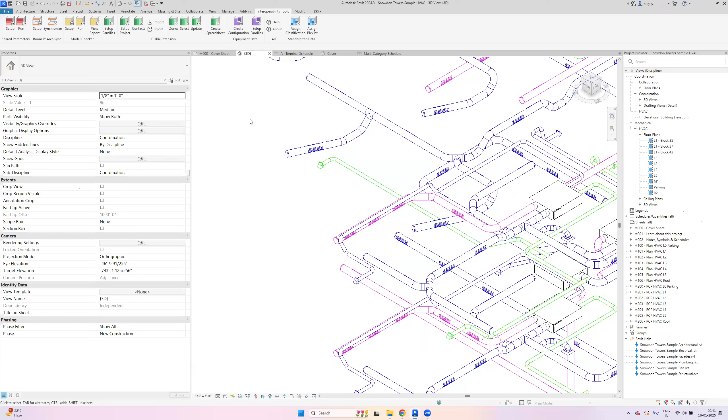For an example, I have this. Can I pick this? Okay, I want to change the airflow of this air terminal. Where is the airflow? Here is the airflow, it's 100 CFM. If I want to change this CFM value to another number, let's say 200 CFM, without going into Revit, how do I do that? Not only one, because the air terminals which are on level 1 have a different CFM.

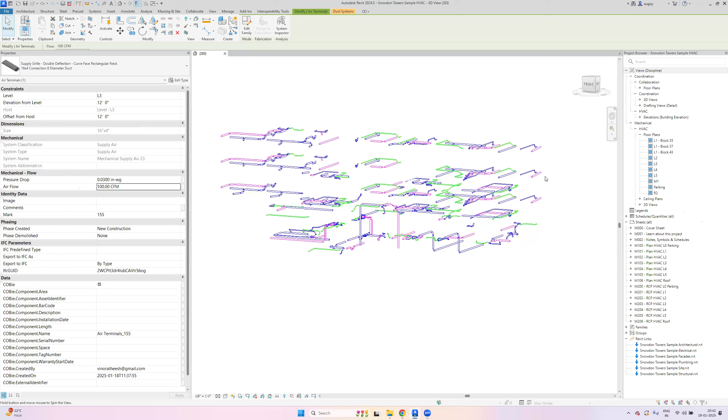They have different CFMs based on the duct sizes. So based on my logic, I want to play with some values, some parameters in bulk. How do I do that?

The first concept in Dynamo - if you join any training institute for learning Python or C, they start with a concept called data types. Even we are starting with that, because if you are confident on data types, from the third or fourth day itself you started playing with your own scripts.

Seriously, I'm not joking, it's my promise. By day four you will be creating your own scripts - how to rename, how to change values, how to set elements. For example, if I have electrical fixtures at 1300 and later an instruction says the electrical fixtures have to be set to 1425, or electrical fixtures at 150 need to be at 350.

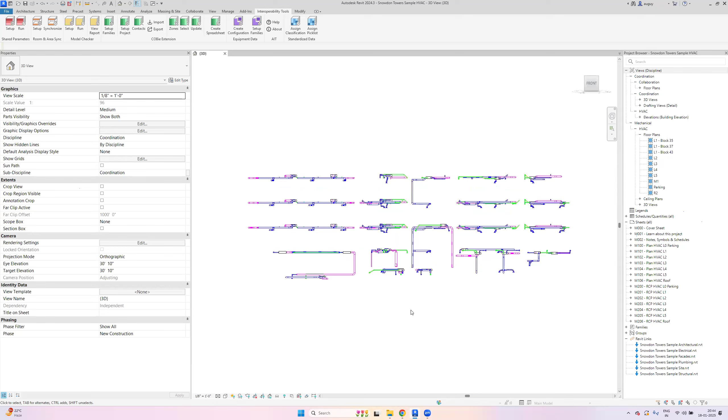With the help of Dynamo. Dynamo is very simple if you understand the data - if you understand what the data exactly is, you can easily sort it out and manipulate the data easily.

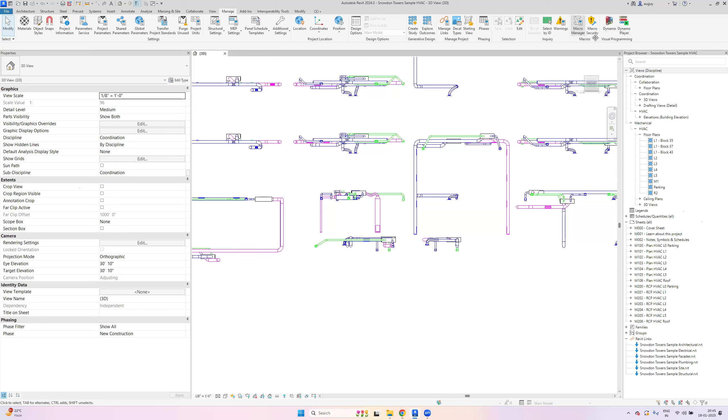First, where is this? In Manage, in the visual programming panel - it's not programming, it's saying visual programming. So when I just click on Dynamo...

Now, the specialty in our training is this: generally if you are alone without any assistant, you can create maximum one or two scripts a day, to be frank. But if you have an assistant helping you with the complete process, you're just like a toy - there is someone helping you as a Dynamo expert. Who is that person? It's not me, seriously, it's not me.

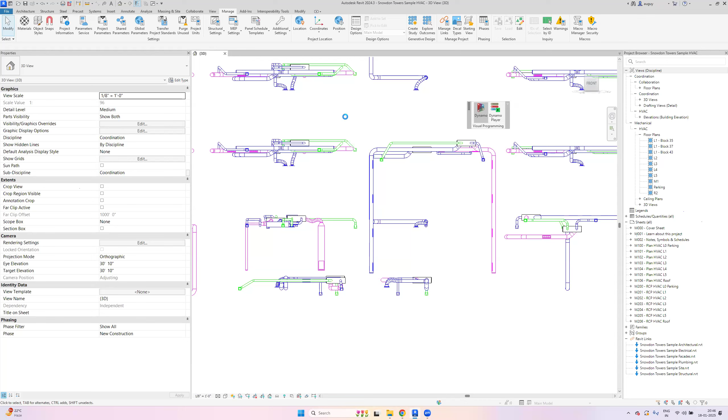It's AI, artificial intelligence. We are calling it Bimtra GPT - our own platform developed for students who want to learn automation stuff, or for managers who get stuck and don't know how to write a BEP - it will help you write even that. This is completely for the people.

This complete interface looks like ChatGPT. We are using not only ChatGPT 4.0, but other different LLM models to get our scripts more accurate than ChatGPT. We have integrated many LLMs - even Gemini, Claude, and PaLM 2. These are called LLM models, language models. We'll come to this later.

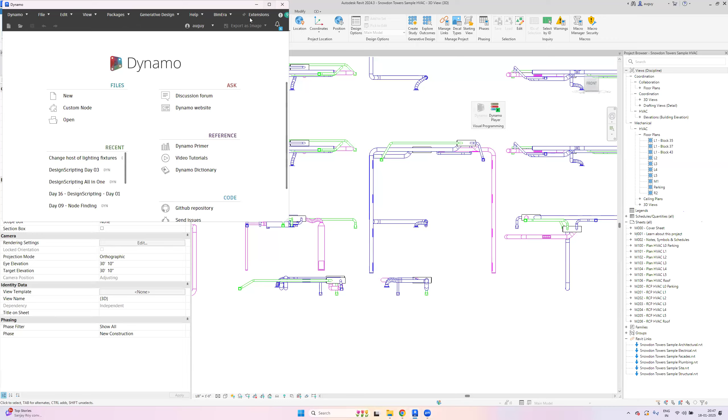Generally I don't disclose this. I don't take this kind of training if it is not a proper training - I generally don't take these kinds of workshops if it's not a training.

So this is our properties palette, guys. We know that this is our properties palette for our BIM modeler and senior modeler and coordinators and managers. But we have another properties palette. I'll show you in some time. Okay. So these are nothing. This information we have in this properties palette and this edit type properties, they are not even 5% of the actual parameters we have. Seriously, I'll show you. Okay.

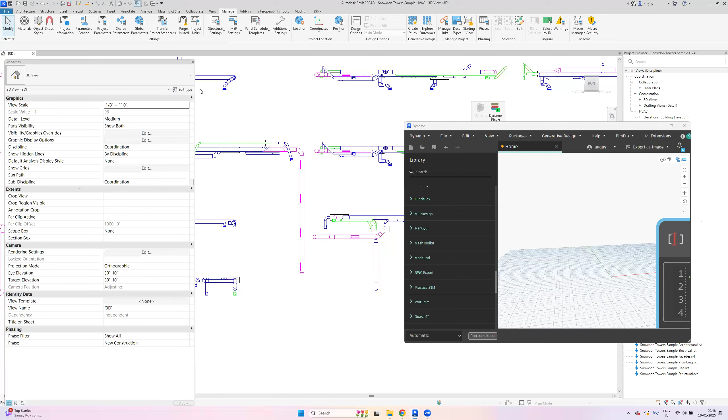So I'll just place it back. And on the left hand side, view scale, detail level, parts visibility, graphic display options and display, all of them are parameter names. We know that. But in terms of Dynamo, we'll call that a variable name. Parameter name, we are just renaming. Our pronunciation will be something different: instead of parameter name, we just call that a variable name.

Variable name. Okay. And the right hand side, the one we have called parameter values. Parameter values. So we will call this a variable value. Variable value. Okay. So every value has its own data type. Data type means, in the sense, it looks like a number. So number is a different data type.

This 96 looks like a number. This is looking like a text. This is looking like a text. This is looking like a button. Button, text, text, text, button, boolean. So it's like a checkbox. Checkbox, text, checkbox, checkbox, number, text, checkbox. So button, checkbox, text, number, text, button, and the text, empty, something. It's not there, it is null. It is empty. Okay. Empty is also a data type. Let's call it empty or null.

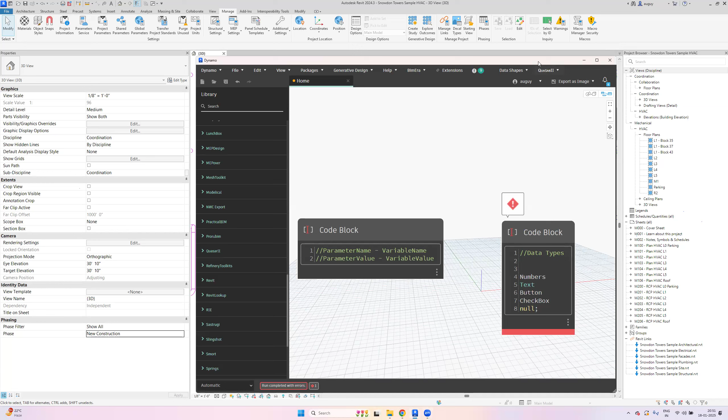So text. So while I keep on pronouncing, we have seen numbers, text, and button and checkbox and null, I mean, empty. Did we see anything else? No, right? Did you see anything else new here? Guys, did you see anything else? No, right? Come on, speak up. No, sir. Yes. No, right? So how do you handle all this now?

For example, if I just pick any element, let's say I'll pick an air terminal. If I pick an air terminal, again, we'll see the same thing. Text, number, text, number, text, number. This F is not actually a text. This is a number only. Okay, this is also a number. Even though it looks like a text, it is not a text. We'll see now. If you are able to play with all these parameters, you are almost on track. But understanding is something. No, it's not that easy.

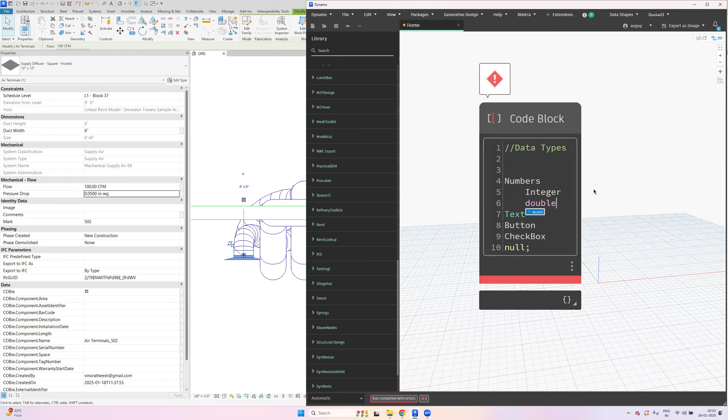Okay, first of all, how do you call these numbers? We'll call this an integer and we'll call this a double. Text we'll call a string. And buttons, keep them aside for now. Sometimes this is part of the UI or element ID. Okay, we'll see this later. Checkbox we'll call booleans. Null we'll call null. I mean empty values. If there is no value, we'll call it null. So these are the data types we have.

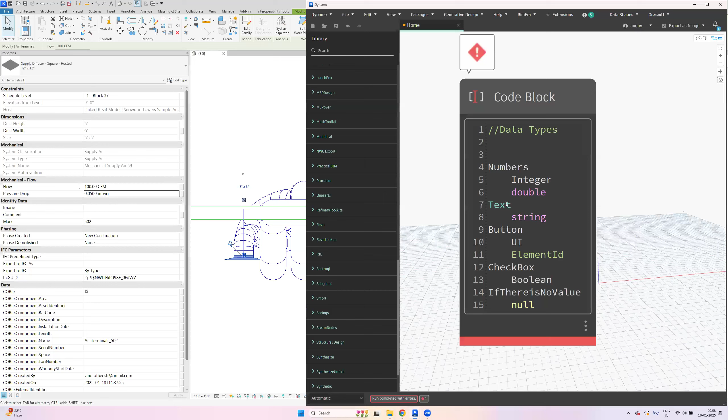So how do you use this and understand the narrative? For example, I have this. How to pick this model element? Select model element. So I'm telling it very clearly: can you please select the model element? I just selected here. So this is saying you have picked a 12 by 12 inch air terminal. That's a 12 by 12 inch air terminal.

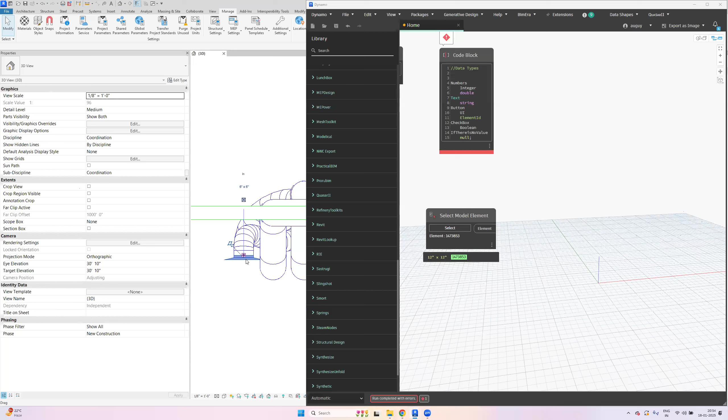Now, if I want to just know the name of it, or where the location of it is, or the ID of it, or the system type of it, or the level of it, if you want to know all this kind of stuff, we will be writing a dot. I need ID, dot ID. I need a name, dot name. I need a location, get location. I need dot, what else we have? Height. I need dot length.

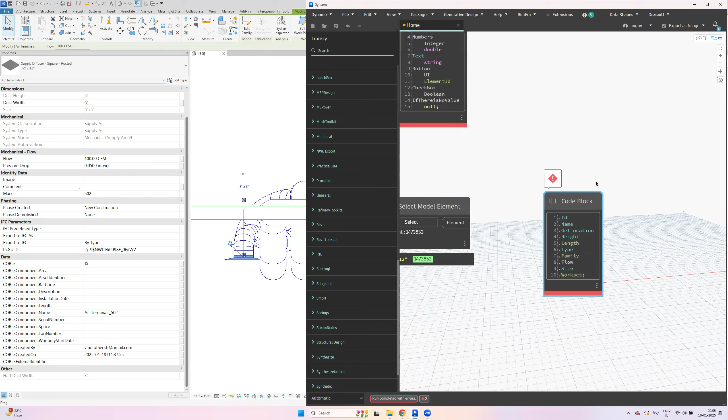Okay. I just need the type of this. I just want to know what kind of family this is. I just want to know what the specification is, what the flow of this is. I just want to know the size of this, the pressure drop, or the phase of it or workset of it. So we are using the dot in front of what I exactly need. Guys, I hope you understand what I'm trying to convey here.

Okay. Yes, so if I need any information, there is a concept in coding to make our understanding easier. I'm explaining this to you. We have a dot process. So after the dot, whatever you ask, it's going to give you. But what do you exactly need? Do you need the ID for the duct? Do you need the ID for a tray? Do you need the ID of a pipe? Do you need the ID of a wall? What do you need exactly? For now, it could be anything.

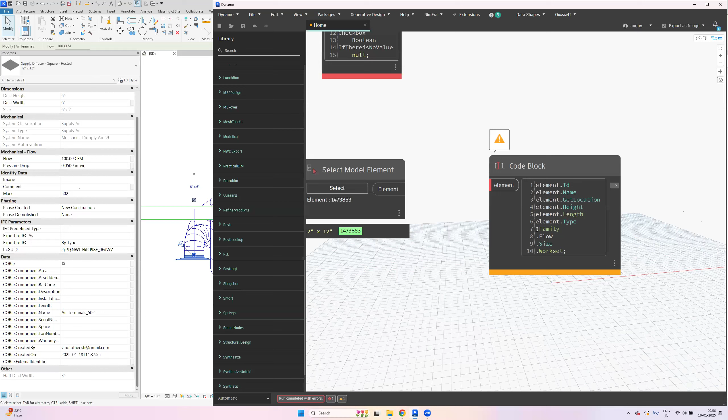I just need an element. I'm already having an element here, and the element is waiting to get the instruction, I mean, to get the data. So I will type the element. I have an element, can you please get the ID of it? I have an element, can you please get the name of it? I have an element to get the location, the height, the length, the type, the family, the flow, the size, the workset. Guys, are you clear now?

Are you clear now? Yes. Yeah.

I type element and put a dot next to it, you will find a lot of nodes here. And I don't take training on this library because this is not for beginner students. We have a dedicated and very detailed one for node finding. This process is actually called node finding. If you're expecting a node which is already there, someone told you, "There is a node, but I'm not sure from which package it is. Just find it." To find that particular node itself, you will kill 1 hour.

Seriously, the reason is you have to apply 5 to 6 different strategies to get that node. If you don't know these 5 strategies, you will never get the node. And you consider there are no such nodes, and you just relax and do your routine manual work again. For us, then what is the style of searching? Control F. This is for our beginner students. Understand? And this is a find your node function.

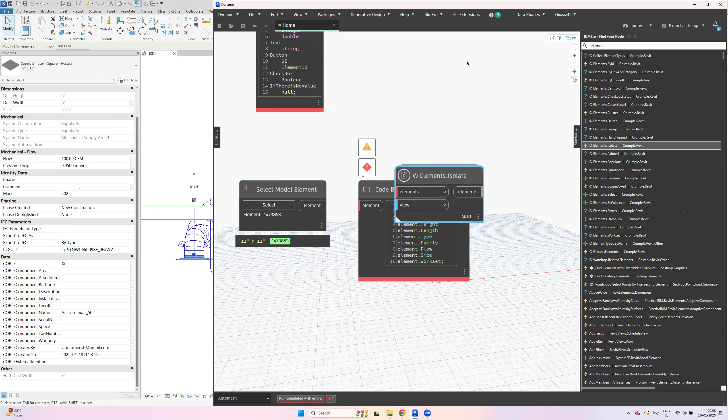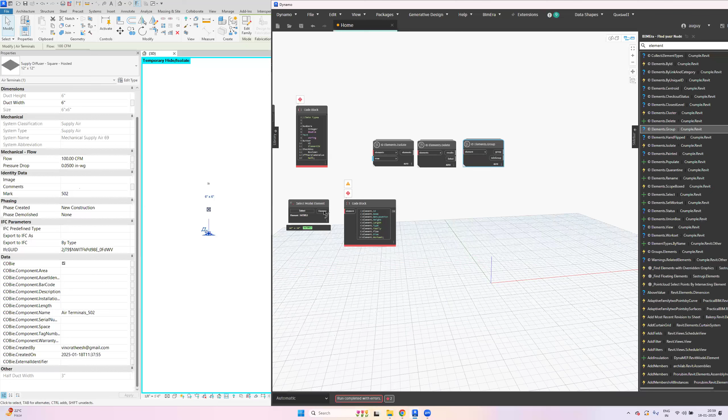So this is to help you with how you are going to utilize this element. So element dot isolate. If you connect an element, that will isolate it. Can you see that all the elements got hidden now? Are you clear? So elements dot isolate, elements dot delete. This is going to delete the elements. If you connect an element to this, it will create a group. So if I connect this, that's going to be created in a group now.

If somebody comes and asks me, Kumar, can we do this? Even I'm not sure, because I already have a set of nodes which do that kind of function, but I haven't gone through it before. But with the help of this node, when you type an element, you can see all the functions.

There are thousands of nodes. Even they are in this library also, but you can't find those. That's really a time-consuming thing. To save your time, for example, if I want to play with a work set, I'll just type work set here. I got some hundreds of nodes.

Okay, but if I type a work set here, I'll get only 20. If you want to get the rest of the 80 set of nodes, then you have to apply the five different strategies next to the work set. If you don't know, you can't get all this. You may miss one or two.

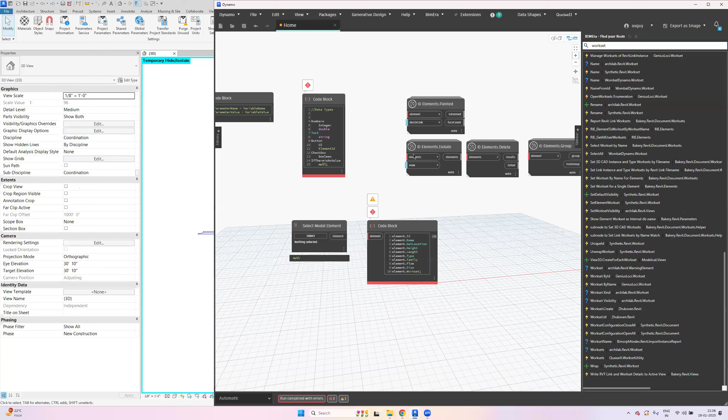So, anyways, element dot delete. Why do we have this? As I told you, while finding a node, we have five different strategies. This dot process is one of the strategies, and I'm sure you can't get this. If I want to get the section box, element dot section box will not work. Element dot view name will not work. Element dot annotation crop will not work. There are certain rules you have to follow.

Now, for example, I just picked an element, and I want to see the parameters. If I have an element, simply I'll type element here. So element dot parameters. Oh, okay, I have a thing here. Let me show you element dot parameters.

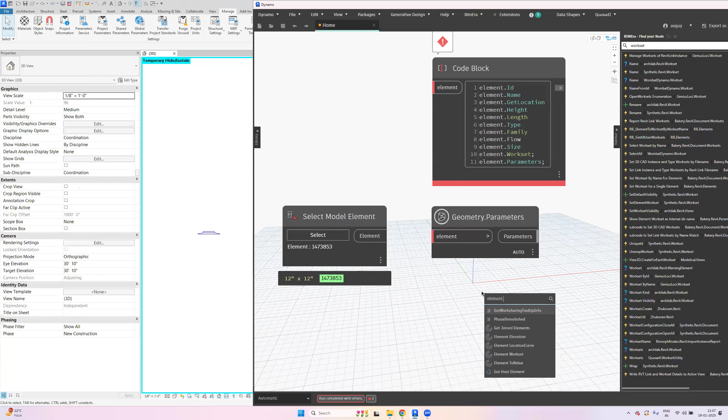I have an element dot parameter. Which is the right one? Can you guess? If I connect an element to one of these two nodes, one should work, the other one will not. Which is the right one? Come on, tell me. The geometry dot parameter? Okay. Come on, give your views.

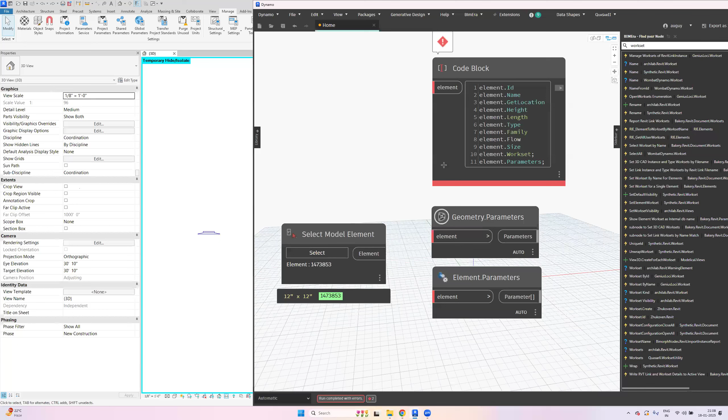There's nothing personal. I think both are correct? Both are correct, because the input is asking for element and there is an element for both. Nice logic. Okay, 90% of the logic is correct. Let me see whether they are correct or not.

If I connect element to this element dot parameters, it's giving me the parameters because this is expecting an element. How do you come to know what a node is expecting? Let's do anatomy. Anatomy in the sense what?

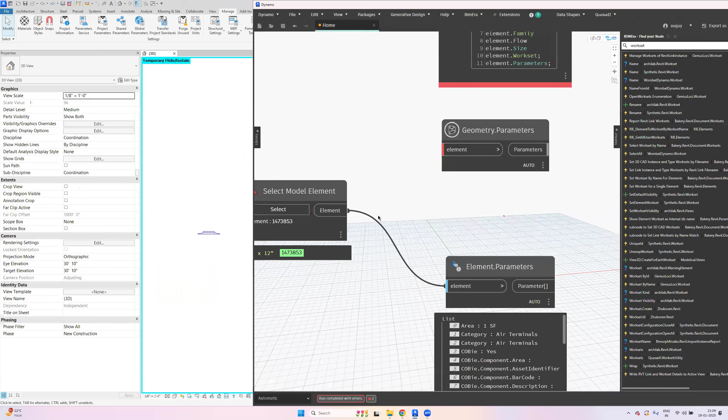Anatomy in the sense, if I have a reptile, like a lizard or a snake or a cockroach, I'll cut it and see the complete organ structure in it. And once I know everything, I'll stitch it back. It's the same, we have a node anatomy. If you don't understand the node anatomy, you can't handle the nodes. Seriously.

So here I have connected an element and I got the parameters. So what you are connecting to it and what you are getting out of it. Well, as per your statement, can I use both? Why isn't it working? This is expecting an element and this is giving an element. But still it is saying

geometry.parameters operation failed. Apparently you're trying to use a structural design package. Oh, what is the structural design package? It could be anything.

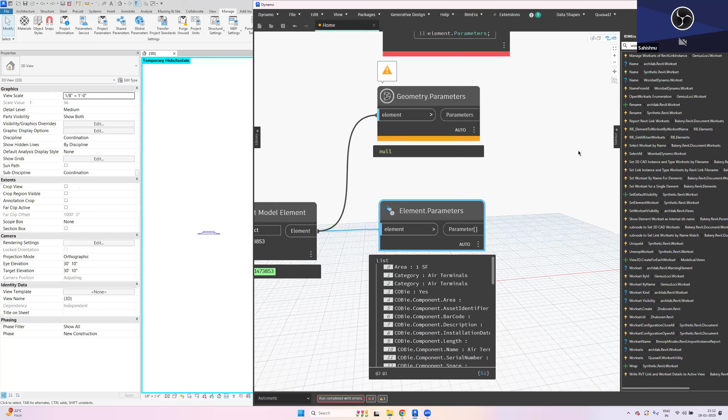So you have to find an alternative node to fix it off. This is node finding, the one we're seeing, and alternative node finding. If you're not able to repair it, then replace it. Simple - if you can't repair, simply replace. Is this clear? This concept is called alternative node finding.

So I have parameters now. I want to play with one of the parameters. Let's say this isn't working - we'll see in the training why it isn't working, we'll see that later. So I have all these parameters, only 50 parameters, including the COBie parameters.

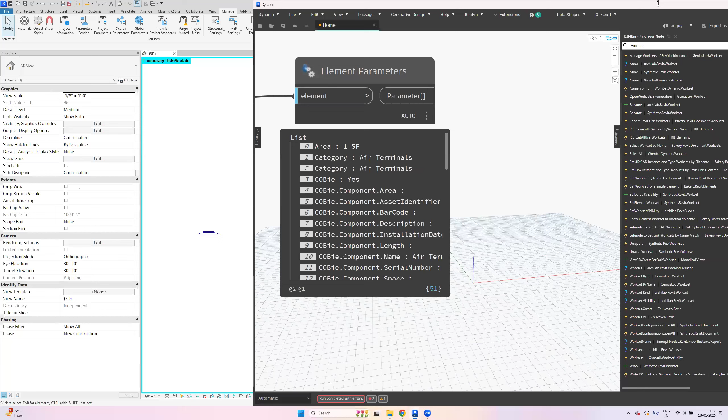Rajesh, you told me that for developers we have another properties palette. What was that? Let me pick some element and go to... oh, I didn't install that in this machine. It's called a Revit lookup tool. I think I can install it now, just give me a minute, but I have to restart Revit. No, we'll do that later, I'll show you at the end of the training.

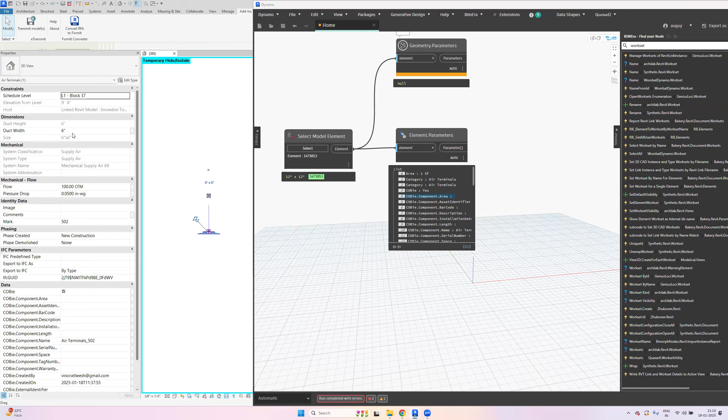So there is a tool called Revit lookup tool, where you can find the actual parameters behind every element. Now I want to change the schedule level from L1. Let me click here - I would like to change this level, first let me change this mark value from 502 to something else.

How do I change that? Let's say get parameter value by name. When I connect an element to the element, I can take number of connections from the same output - you can take thousands of connections from one output, no limit, but you can't connect more than one to an input. So if you connect something to this, the first one will be disconnected.

So the element node is asking the parameter name. When you hover the cursor on this, it tells you what it's actually expecting. Most of the nodes will show you something, but we don't notice it - we don't notice what it's actually expecting, and lacking that information, you seriously don't know what to connect.

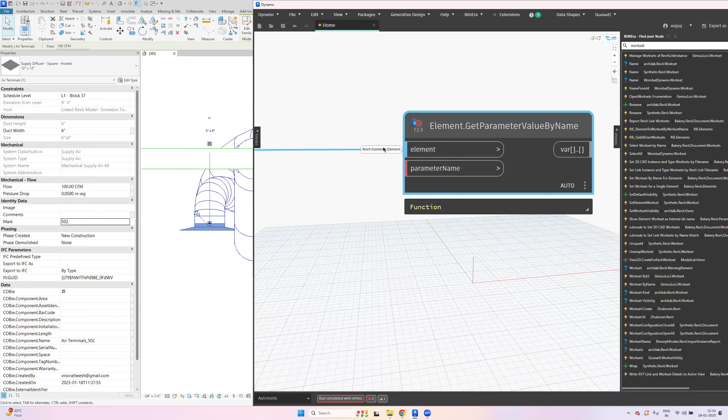Here it is expecting Revit.Elements.Element. We have to consider the last one, guys - let me take a screenshot. So, Revit.Elements.Element - you have to consider the last one here, the 'element'. Then you decide, okay, that is expecting an element.

Then what is this, why am I telling you not to consider this? Because it's just like a path - it is a path of it. Where are you getting this node from? Revit, elements, and element - that's a path. And it's clearly saying it's expecting an element, the last one you have to consider.

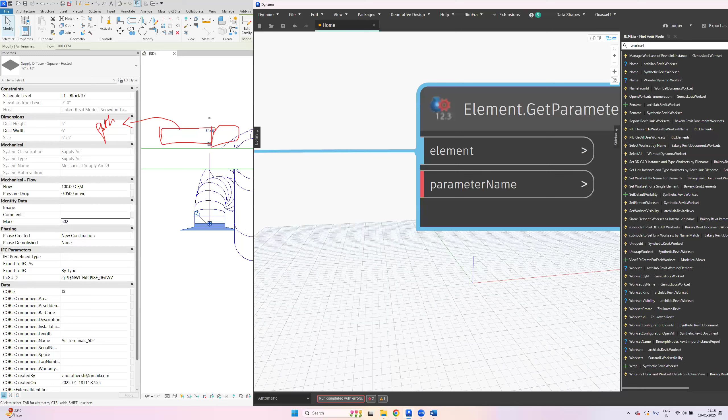When I hover the cursor on this, it's saying the name of the parameter whose value you want to obtain, and it's a string. Okay, I'll just go to this library, type a string, and connect the string to this. What do you want me to write now? The parameter name of this element - check, do you have any other parameter?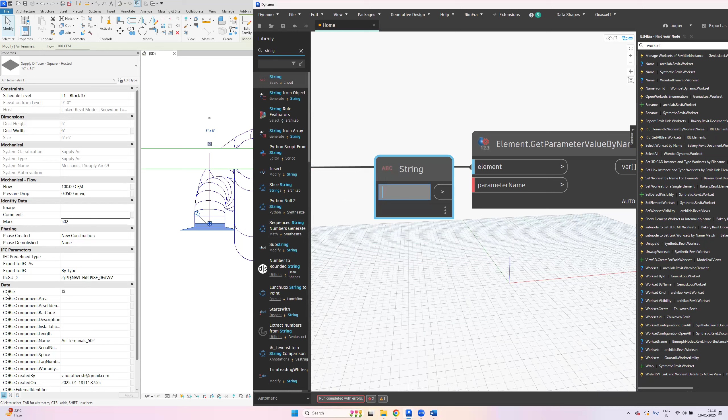Let's say mark - I'll type mark and connect this to this, and you will get something. It's saying 502. Okay, fine, what do you do with this 502? I just want to change the number. Okay, how do I change the number?

Like how we have a node to get the parameter, we clearly see that if I connect an element and the parameter name, I'll get that parameter value by its parameter name.

By its parameter name, I will get the parameter value. I'll get the parameter value by its parameter name. So it is asking the parameter name. You have to frame your sentence, otherwise you can't understand the node names. You have to frame yourself, otherwise it's very hard, okay.

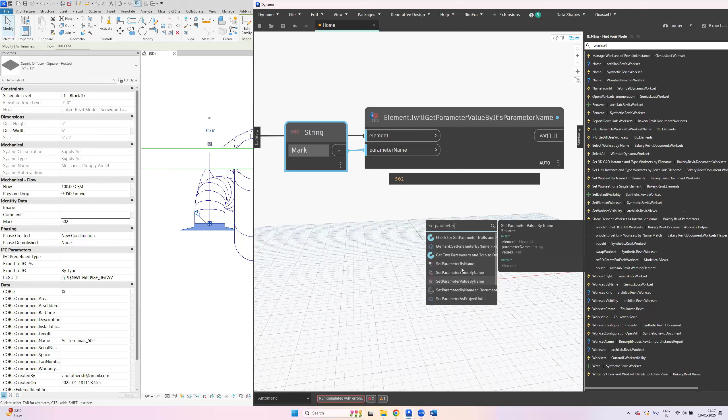Let's say set parameter by name, set parameter value by name. There are multiple, so which is the right one? Pick anything and check which is actually working.

So this is expecting an element. I connect the element to this element. This is called a wire. It's called a wire, so you have to connect the correct wire to this. And the parameter name - I want to change the mark parameter only, I want to change the value of the mark parameter. So I'll simply connect this to this.

Now I want to change the value. So what is the value before? It's 502. What is the actual value we need now? It's 500, correct? So 500 is what? What type of a data type is the 500 based on this strategy?

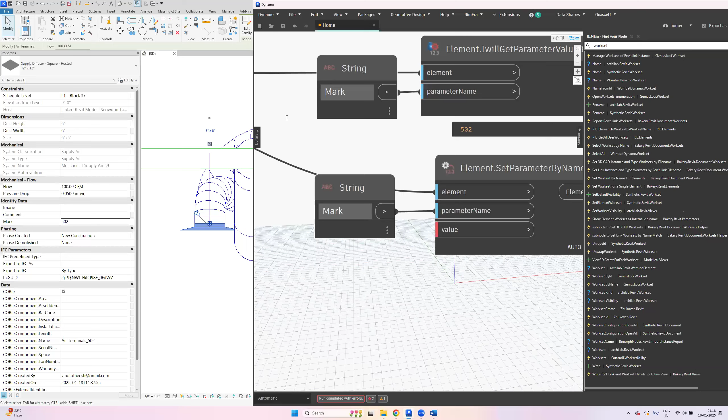500, is that a number or a text or a button or an integer, checkbox? Integer, it is a number. Okay, it's a number. If you have like 1 2 3 4 5 6, this is called integer. But if you have 1 2 3.456, if you have a decimal value in your number, that will be called a double. Both are numbers only, but the way we pronounce it is different. We'll call this an integer and we'll call this a double. Clear? Clear everyone? So this is an integer.

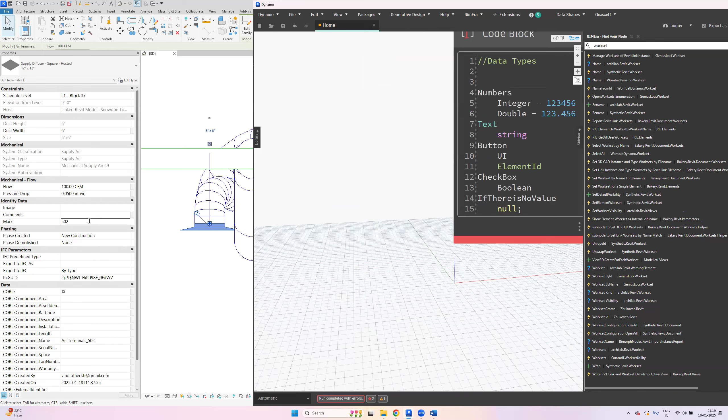This is an integer, and I'll connect a number. I'll write a number, I'll set 500 to this and connect it. Will it work now? Will that work? Come on, tell me, will that work?

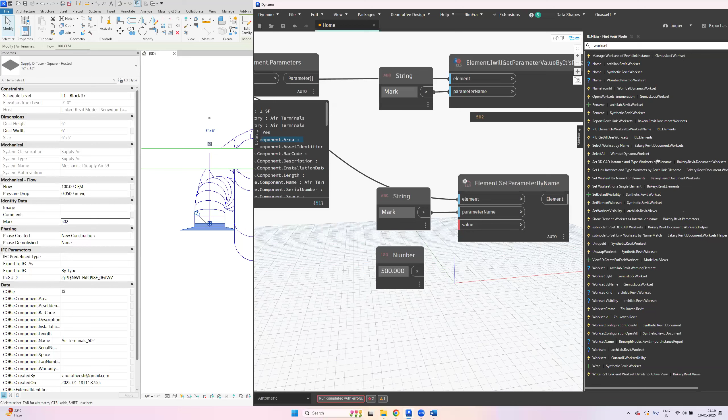I think yes, correct? So when I try that, oh, there is a warning, not error - orange color. No, I mean orange color represents the warning, don't call it an error. Okay, so when I hover the cursor on this, it's saying element.set parameter by name operation has failed. Okay, I know, but why?

The parameter storage type is not a number, but it is a number only here - that's the reason I have connected a number. Why are you saying that the storage type is not a number?

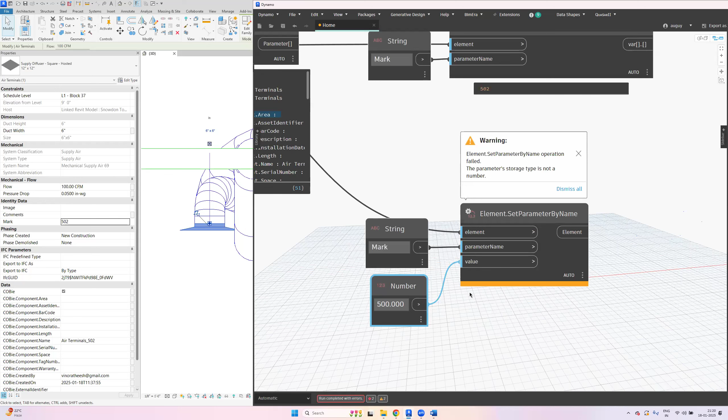Then, if I want to know what is the storage type, is there any way? If I know the way, I can simply change the value, correct? Am I right? Because we have only 5 data types. So 1, 2, 3, 4, and 5.

UI and element IDs, we'll see they're not part of it, we'll call it a different data type - they're called application data types. Okay, these are general. If you join any training program like Python, if you start a Python, if you start a Ruby, if you start a C Sharp, so we'll teach integer, double, string, and boolean, and null, and list - I mean if you want to play with list of items, then list will be included. So we have 5 now.

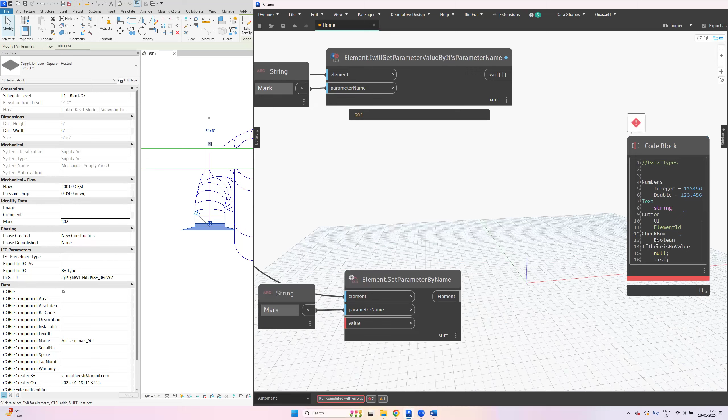Cool, so what is this expecting? I know 500 is a number, so I have connected it. How do I come to know what is the storage type of this? I have a value, I have a value, I just want to know the type. So object dot type.

Object dot type - check here now. Check here. If I connect this to this, oh, that is a string. I think if I change the number to 500, it is accepting it, but it is taking it as a string.

Okay, so if I change this to 600 or something, let me change this to 1000, not with a number, with a string node. Oh, so I have to copy the same string again. I'll change this to 1500. And if I set that, it's changing to 1500. Do you see that now?

Do you see that? If I change that to the BIMera, I can say it's BIMera. Guys, are you clear? Are you clear? Yes, clear. So you have to understand the type of it - then only you can able to play with it.

Okay, now let me show you some other. I have an element and I have another parameter called Schedule Level.

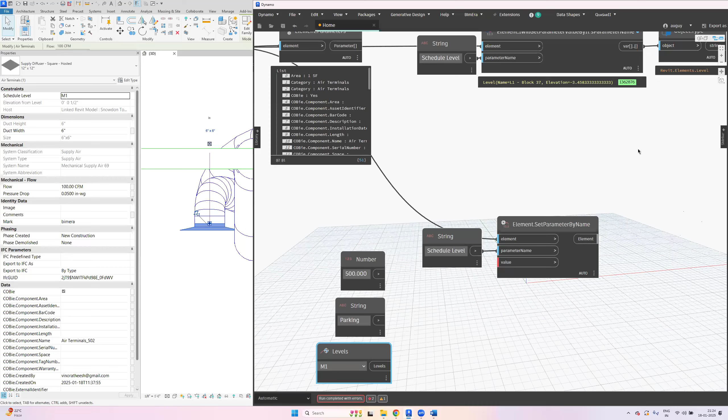Okay, so for now focus on this. So you have to focus on the last one. So based on the last data, based on the last text, you have to understand what it is actually expecting and what you need to be connected. Are you clear, everyone? Yes. Okay, so tell me, what is the value here?

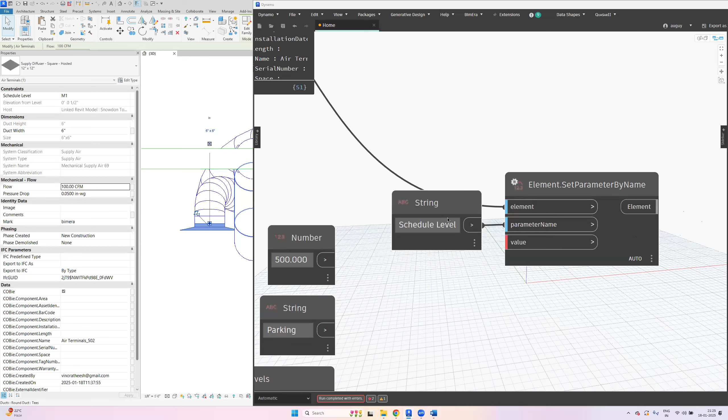Flow. Is that an integer, a double, or a string? Come on. No idea? Check then here. 100 and it's a double.

Got it? But Rajesh, we have a CFM also, right? Then it's supposed to be like a text. Actually, CFM is a unit. in-wg is also a unit. And do you have any units here? Nothing. Okay, for some of the parameters, like we have units, so we won't consider the units as a text.

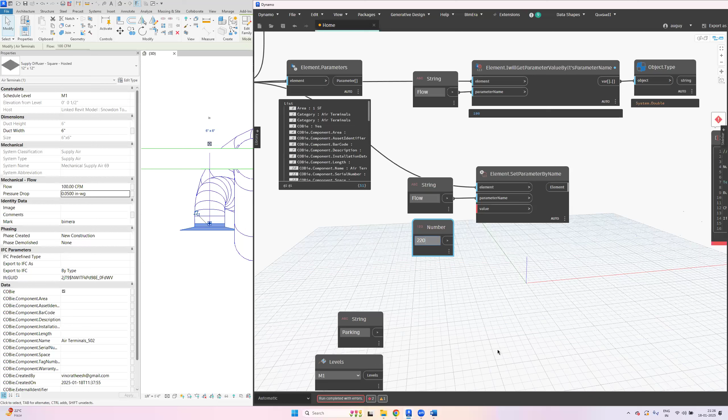If I change this 100 CFM, and what is it? It's a double, so double in the sense it's a number. Pick it and change the value to 200. 200, and connect this to this. So it has changed to 200. So this is the way you are going to play with elements and its data, if you understand the data type of it.

Guys, are you clear here? Yes. So you have to understand like what is an integer and what is a double and what is a string. Have you faced any... generally the same concept I take like 2 days, 2 to

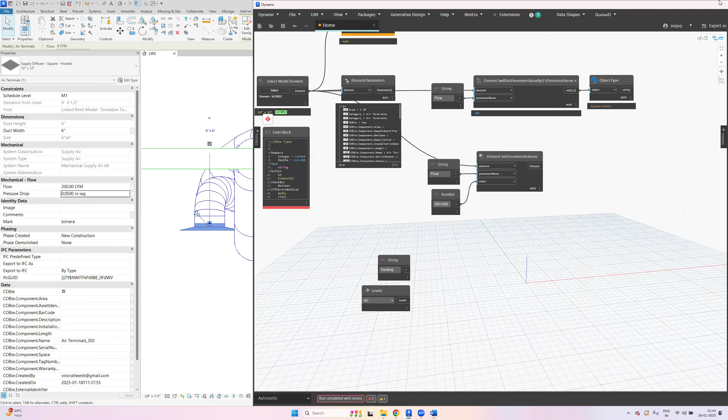So now let me place all the nodes. Control C. I'll place that in Dynamo. See, now in a code block, just copy here. Categories. Control X, all elements of category. See, it will always show you in a flow, so just create it in a flow itself. Element dot get parameter value by name. Not this one, this is a link element. Try this. And room dot finish boundary. Control X, room dot finish boundary.

Curve dot point at parameter. Are you facing any challenges finding a node now? Come on. Point dot add. We'll see what the actual concern is over there. Point dot add. Family type dot by family name. Control X. Family type dot by name. Both are same. Okay. So family instance dot by point. Control X. Family instance dot by point.

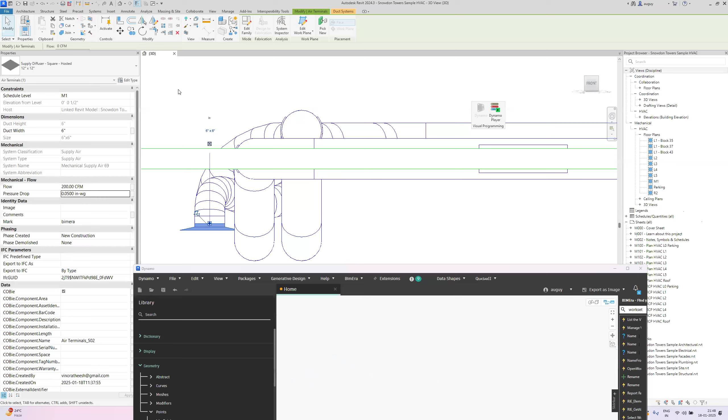Categories, and it is asking me to set the room. Okay. And All Elements of Category node. What do you want me to do with that? So connect the Categories node to the All Elements of Category node. Okay. This will fetch all the room elements in the model. Oh, I don't have any rooms now. Should I create one? I'll create. Let's create one. Okay.

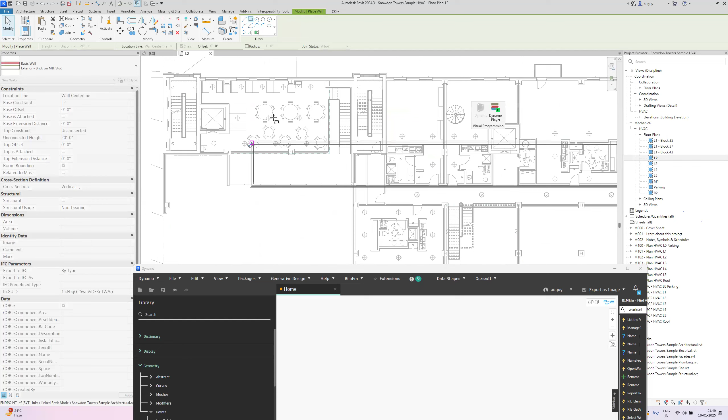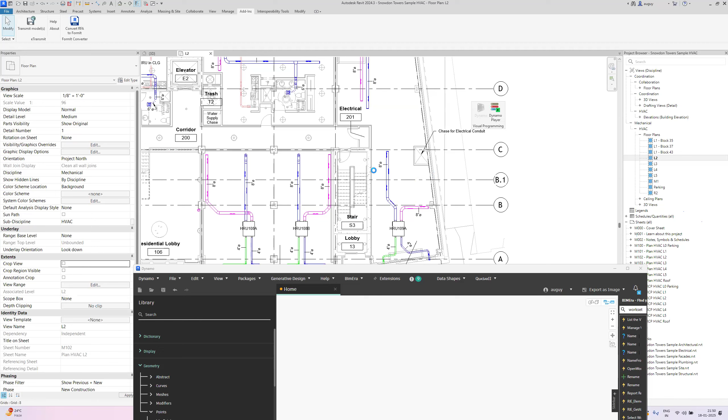This is one. For example, let's consider. Do I have a copy? Okay. I just turned off those. Now I have a wall. I'll use it outside. Okay.

I have rooms now. So it's giving me there are total 2 rooms. Okay. Fine. I'll just connect the elements to element and the parameter name. What is the parameter name I'm supposed to type? Element, connect all the elements to Element.GetParameterValueByName. Input a string node attached to this value, the name of each room. Okay. So I'll add the string node to get the room name. What was that asking?

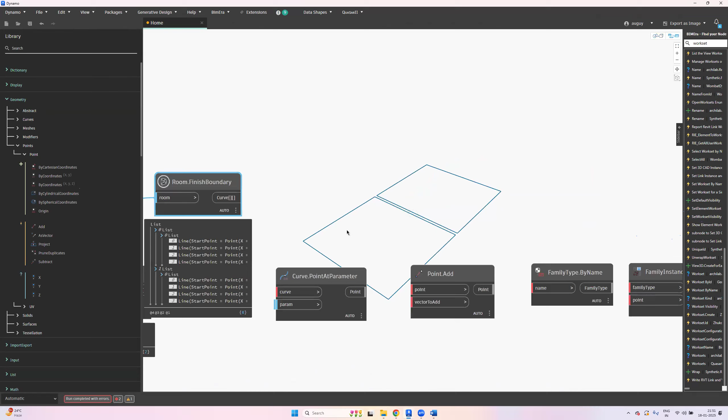Okay, All Elements of Category to Room.FinishBoundary, and it's giving me the boundaries. Do you see that? I got the boundaries now. So what it is actually saying, like Element.GetParameterValueByName after the name. So I have connected from All Elements of Category to Room.FinishBoundary to get the boundary length of each room. Connect Room.FinishBoundary to Curve.PointAtParameter.

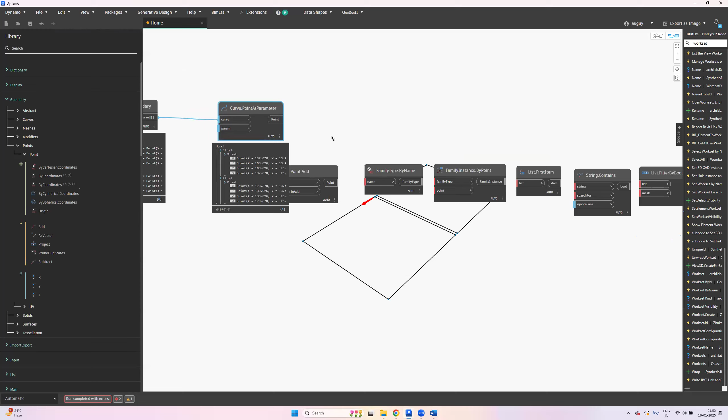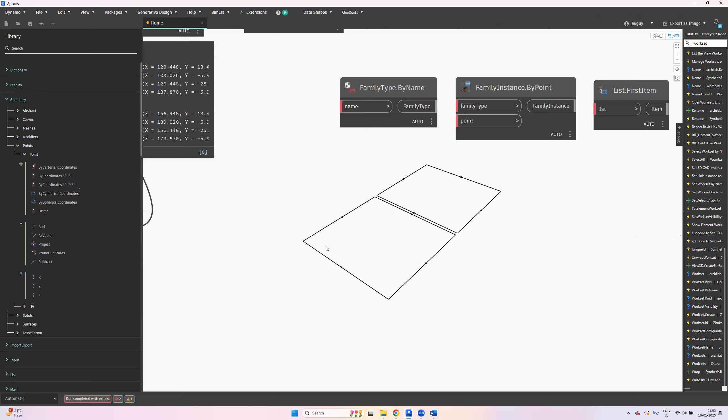Curve.PointAtParameter. So curve to this. So this is giving me something like this. And Point.Add. So what is it? So use a code block with 0.5. Use a code block and type 0.5. Is it? Code block, 0.5. And then this gives the midpoint of each boundary curve. Do you see that now? For each boundary curve, I got 0.5, the mid point.

Okay. So then connect it to the parameter input of Curve.PointAtParameter. And then what do you want me to do? Point.Add node to slightly offset the drain point, using a Vector node or XY inputs. Point.Add. So it is asking me to connect the point, and we have to connect the vector. Yo, we got stuck here. Actually, vectors is another process where we play with the directions. Okay, in which direction do you want me to play?

So Vector.ByCoordinates, in which direction I want this. If I use a slider, integer slider, I will just set the minimum like 0, maximum value like 1, step 0.1. Oh, there's an integer slider. I have to use the number slider with 0.1. If this is enough, we'll be okay.

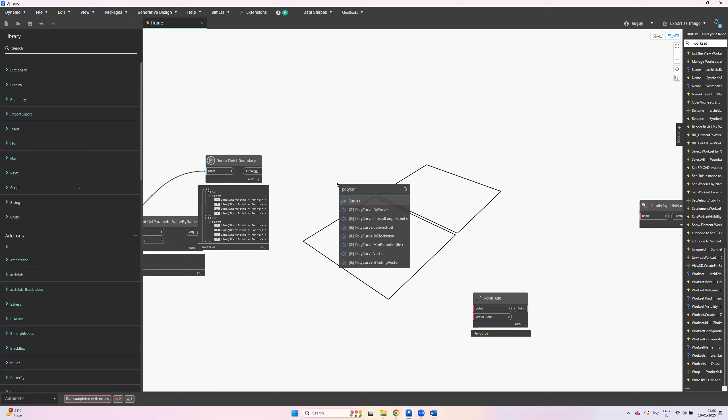Or else we have another style of writing. Let's say Point.Add. We have another style of doing all this, if I don't want to play with all this. So if I have PolyCurve.ByLines, PolyCurve.ByCurves, I have curves now. So I have converted all the 4 lines into a single line now. That's called a polyline; we'll call it a polycurve. And after converting this, let's say,

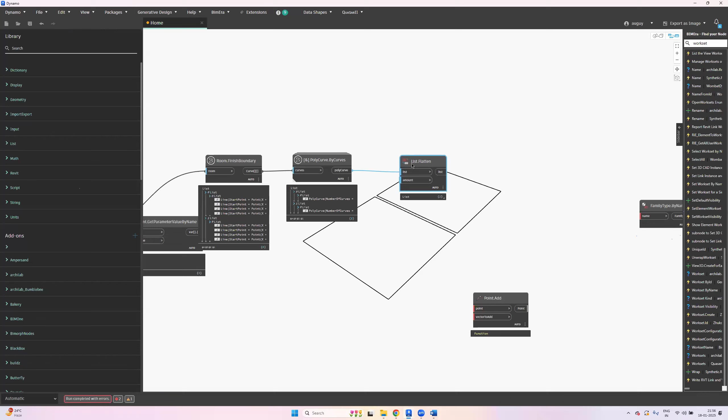see, this is how you are going to learn this. For example, you have a resource and it has helped you reach 30% in the initial stage. And if you know how to fix it, I mean, if it is not the right way, or else if you have another plan, because some of us have a starting issue.

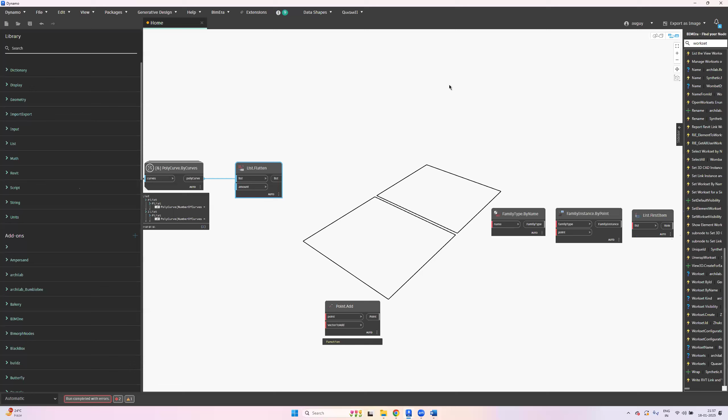So you don't know the way to start. But once it is started, you will be connecting the right nodes to it. So some of us have the same problem. Even sometimes I do have the same problem, even though I'm an experienced person, because I don't know where to start. Okay, so let's start.

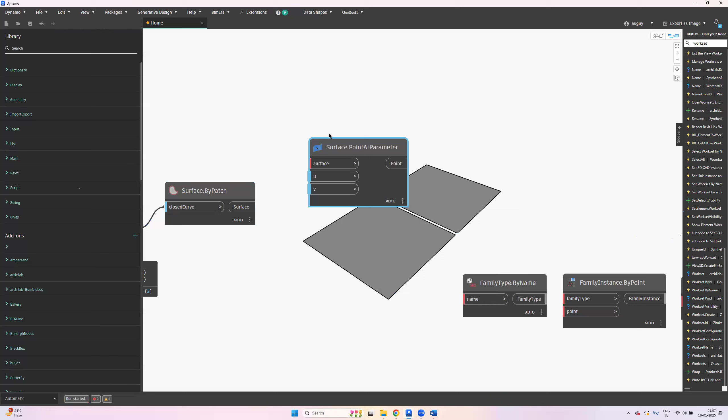So once I have this, I'll use Surface.ByPatch. I'll convert that closed curve into a surface. Now I have a surface, and Surface.PointAtParameter. Connect this to this, and you will have to decide. See, I have a point here, so I'll say 0.1 and 0.1 like this.

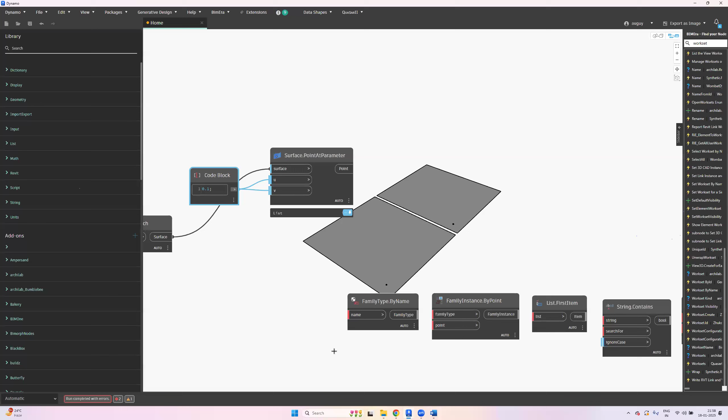So I need a floor drain here. I have the points now. So I will be placing a family instance at this point with family types. If you have a floor drain, you can simply connect that floor drain family type to it. For example, if I have any other element, I'll just show you.

We don't have anything, so heat recovery unit. See, it has placed the two heat recovery units, HRUs. Do you see that now? Since we don't have a floor drain, we have placed some heat recovery units. Is that clear, Mr. Sismo? Yes. So it's very simple with the help of ChatGPT.

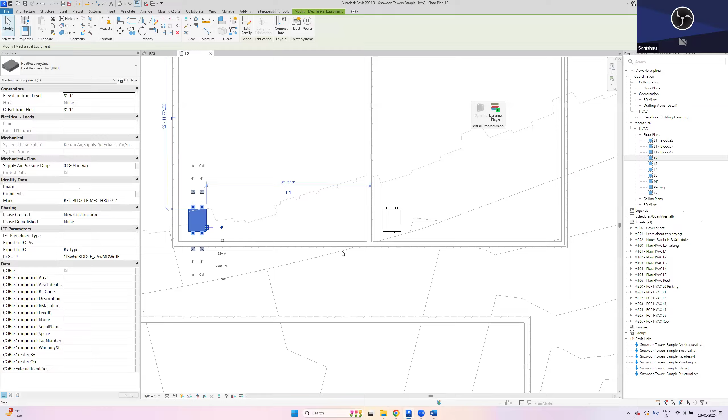But what if you got stuck here, right? If you want to change this accordingly, you can ask ChatGPT: I have floor boundaries. Rather than asking room types, I can just simply select the surface of the floor and place the component. So you have to keep on asking where you got stuck. So here you can ask that clearly: can we change this from the fifth point?

Change the script from the fifth point, the Surface.PointAtParameter. You can ask this clearly. I want you to try this style: getting the lines, convert that into a polycurve, and convert that into a surface, and then get the corner points of the floor. Then place the element.

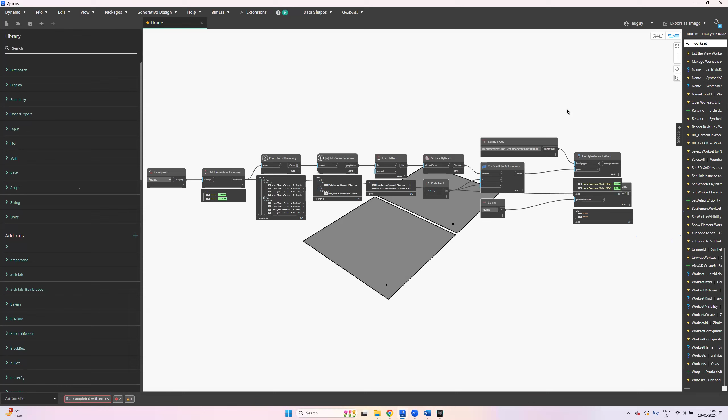Okay, you don't need to take collaborations. Okay, this is like a virtual assistant. It will help you in most of the cases, and by the end of the training, you will be able to completely change everything with our standards, and you will come to know even how to change this as well. The entire thing. Is that clear?

Yes, yes, clear. Everyone? Yes. I hope you enjoyed this example, everyone. Hello. Hello. Yeah, hi. Tell me. Hi, yes, sir.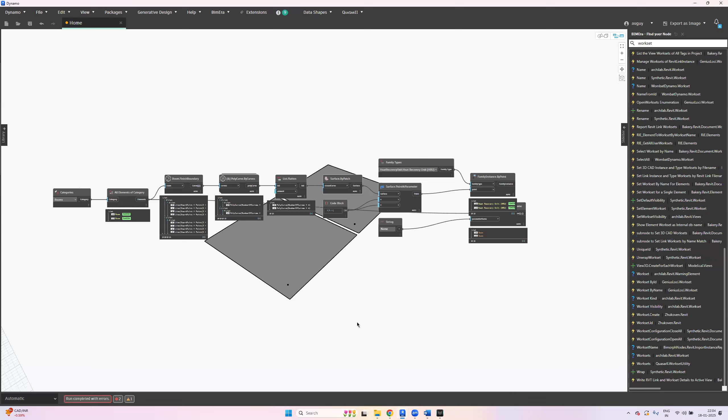I would like to model a shuttering of the structural member, and I would like to take off the area of that shuttering. Is this possible using the script? Yeah, area of what? There are some conditions: when we take off the surface area of a column, we don't need the top and bottom surface, just all four sides. If there is a slab, we need only the bottom surface area. And if there is a beam, we need only three sides, not the top side. So these are the conditions.

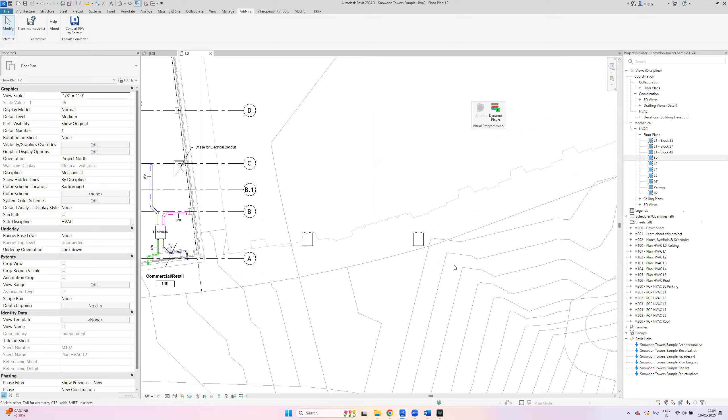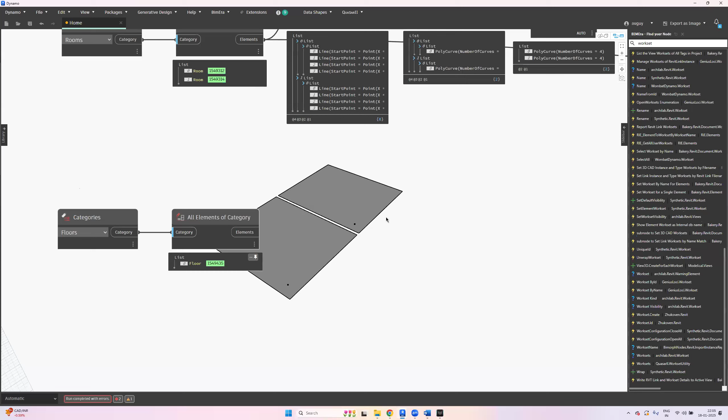We don't have floors, huh? Let me show you how simple this is. Do you want me to start GPT or shall we do it here? Any process. Okay, so I'll just create a floor. So I have a floor now, right? Let me turn off all this geometry and freeze that too.

So I have an element and I'll ask: can you please get me the geometry of the element? Element.Geometry. I have a floor now. I have a solid. Generally, if you have a solid object in AutoCAD, we'd call explode. Correct? So here also we have Geometry.Explode. We have an option called explode.

So when I explode this, what happens? It's giving me a total of 6 surfaces. Correct. So flatten, because I don't want this in a list. It's just a reference node; I don't want to see these lines, which is clumsy. I have a surface and I just want to filter based on the area. So I'll ask very clearly: I have a surface, can you get me the area of it? If you can't find it, keep changing the way of asking. I'll explain all 5 different strategies.

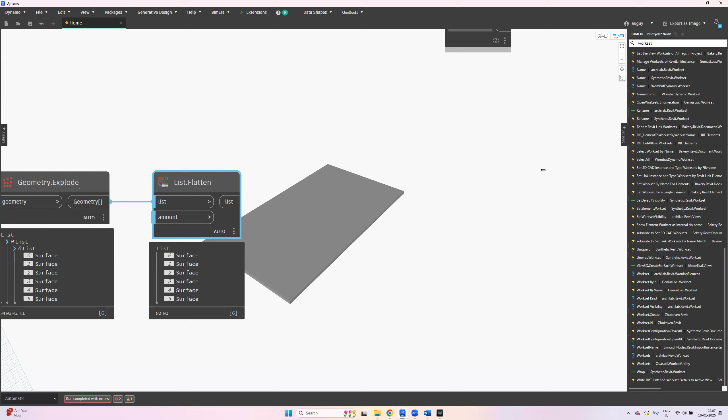Okay, to get it. Where are you? Come on. Surface dot. If I can't find it here, I'll get it here. Guys, am I making you feel bored? No, no. Surface.Area.

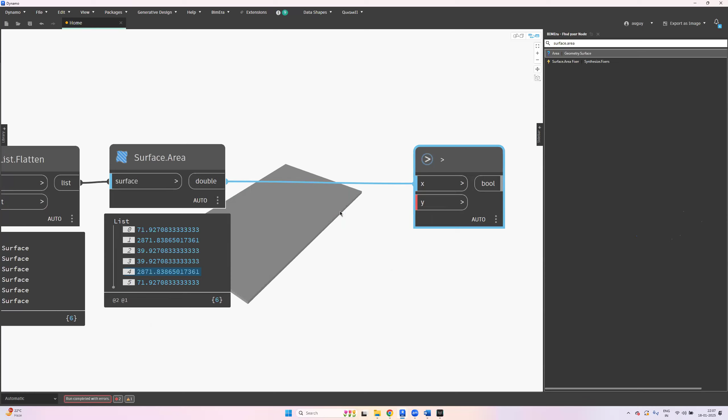So I have the area information now. The highest ones here are like 2871, both top and bottom. Now I will use a greater than symbol to filter those 2 areas. Generally check which has the maximum difference; you have to do some calculations to get the difference. Now I'm asking if it is bigger than 1000, and it will give you true or false values. What do I do?

Filter by Boolean mask. I'll connect this to this, and connect the list to the surface. I've got the surface areas now: these two areas, 2871 and 2871. Now I'll add, sorry, Math.Sum, I think this one. So this is the total area of the floor, your entire building. If you have a number of floors, same process. Is this clear? Simple. Yes.

Or else, for example, I want to do the same with the help of ChatGPT. Let me check if it will give any other solution. I want to get the floors first, and there is a concept in AI called, I forgot now, tree of thoughts. So this concept, I need images. Needed images.

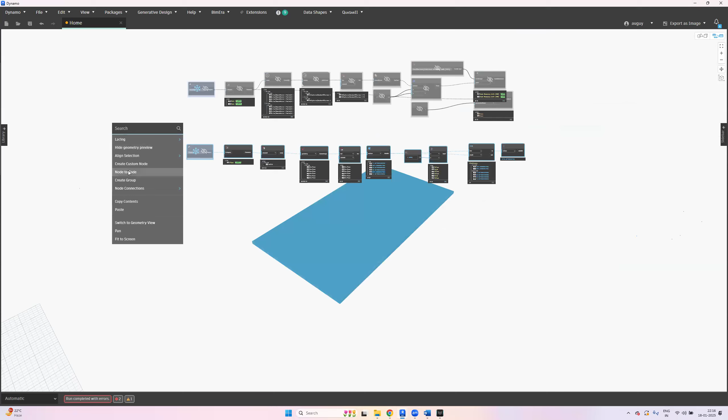See, first I should stop the preview, right? Right, geometry preview. Yep, so control B.

Okay, now I have something like Point.ByCoordinates. I'll do it quickly. Point.ByCoordinates, I have one. Control C, Control V, I'd like to get this on another point.

People keep saying Dynamo is only for architecture people, since I see more examples there, but not in mechanical examples. No, it's not like that. Automation is common for everyone. There's no strict discipline saying only certain people will benefit. Come out of that mindset, automation is for everyone.

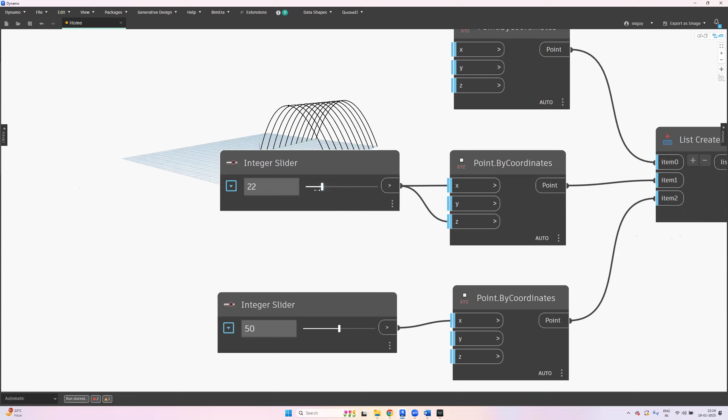Translate, geometry dot translate. Geometry dot, in the Y direction I need 0 to 50 with step of 5. I'll get like 10 or around something, correct? So I'll get like 10. You can change the shape as you need.

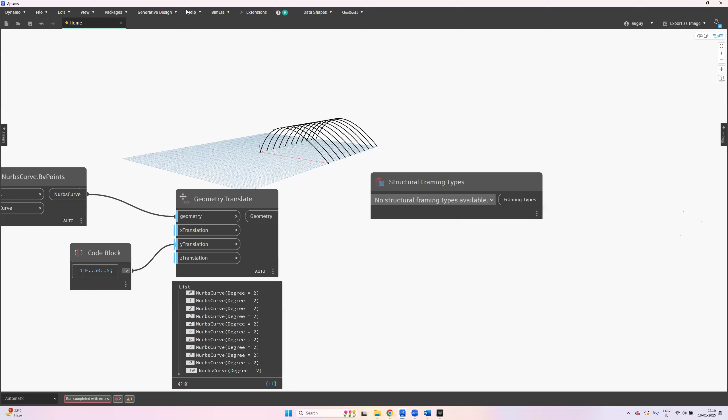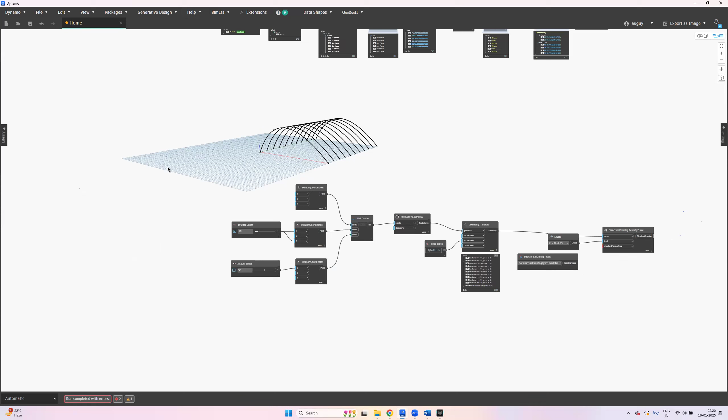Clear, Varun? Varun, you there? You left, you're not here. Okay, anyways that's fine, but Varun has left. Yeah, Varun has left. Okay fine, I thought he was here.

Well, we have a solution for most of our daily routine, like tagging, documentation, coordination, modeling, or any drafting part, we have a lot of solutions for that. But we'll see tomorrow how it will be. Clear everyone? Day one, this is...